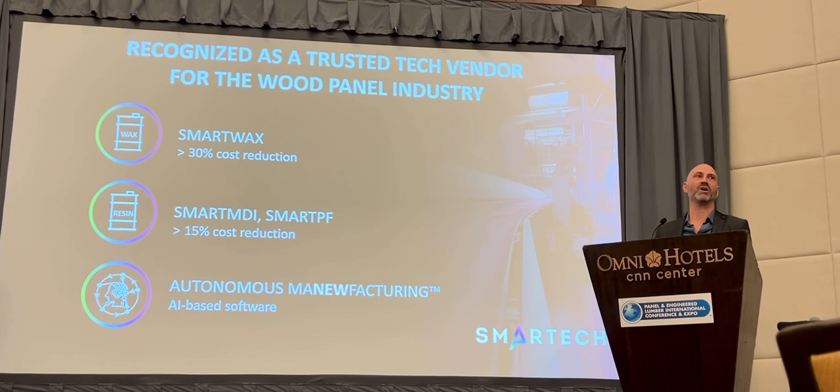A little bit about SmartTech. SmartTech is a technology company doing optimization on-premise, dealing with raw materials and optimizing them in real time, mostly known for the SmartWax system that reduces raw material by more than 30%, and now with Smart Resin, MDI, PF, doing more than 15% reduction.

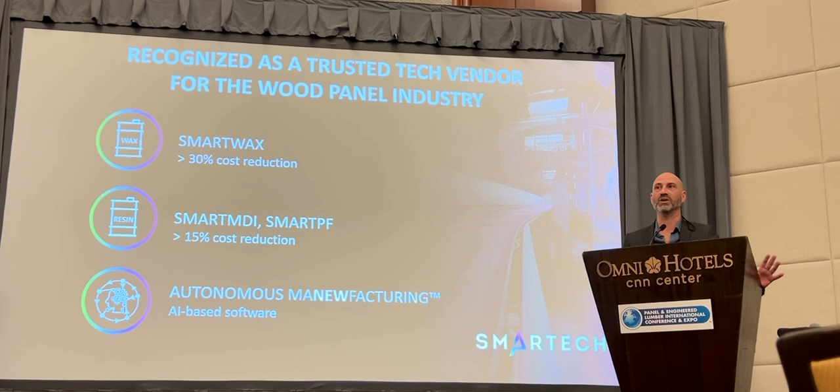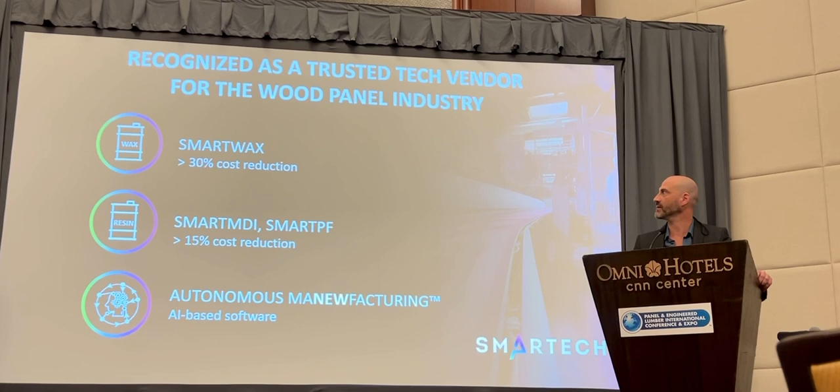I'm going to talk today about autonomous manufacturing, dealing with different raw materials, the virtual one, data, and what we can do with your data, and how we can optimize your production line with that technology, with AI technology.

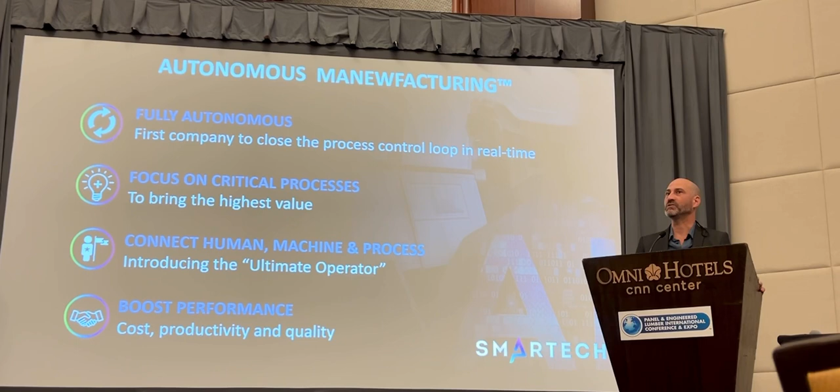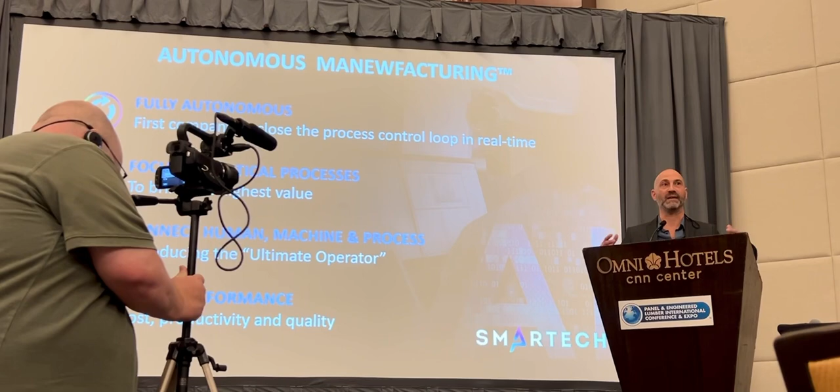When we started our journey around 8 years ago, we tried to focus on a couple of key factors that would bring something really different than Industry 4.0, trying to see what the future would be.

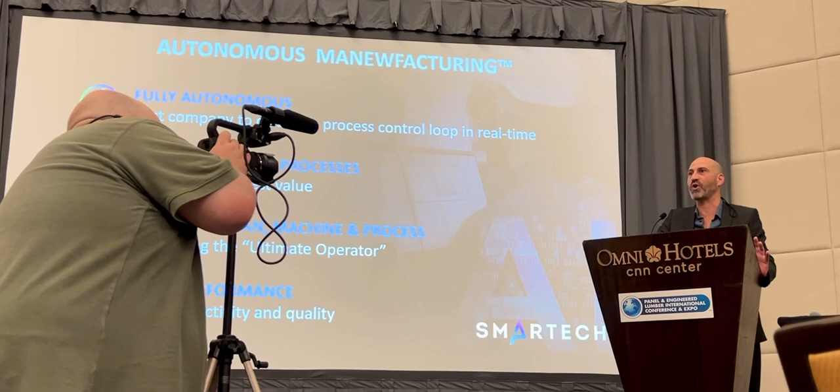The first impact we wanted to work with was to be proactive. We don't want to just give a graph and let the operator guess what to do. We wanted to really close the loop and give real-time values into the line.

The second point is, of course, understanding the production line. Every different factory, mill, or facility has different challenges, so we need to define the critical areas we'd like to focus on and work with you to define the question.

AI brain has a lot of knowledge, but how do you define the right question? That's something we work on with the customer.

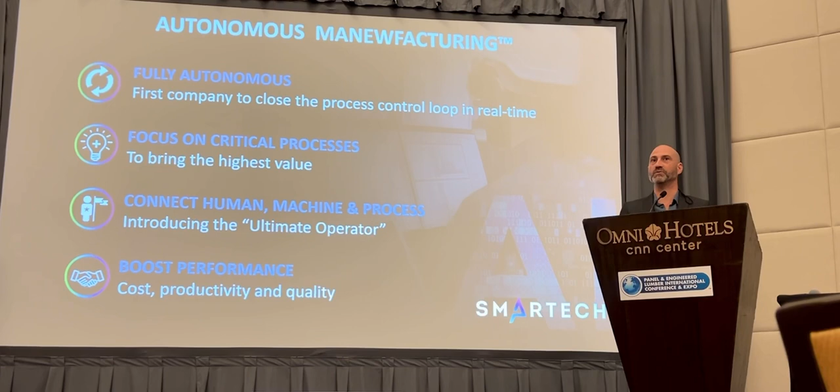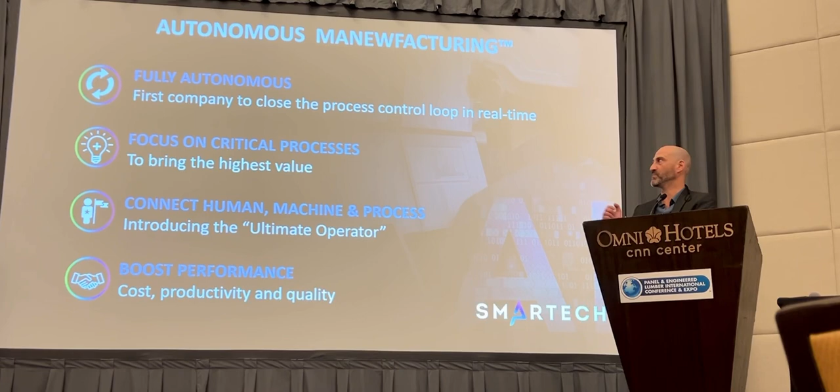Another point Timothy mentioned: what's the impact of the human being? All the technology until Industry 4.0 dealt with the connection between the process and the machine. But going further, putting the human factor into the game, how can we create that connection between the human, the operator, the key holders in your production line, the process, and the machine, bringing them together and creating the ultimate operator. And of course, we're doing all that in order to bring value.

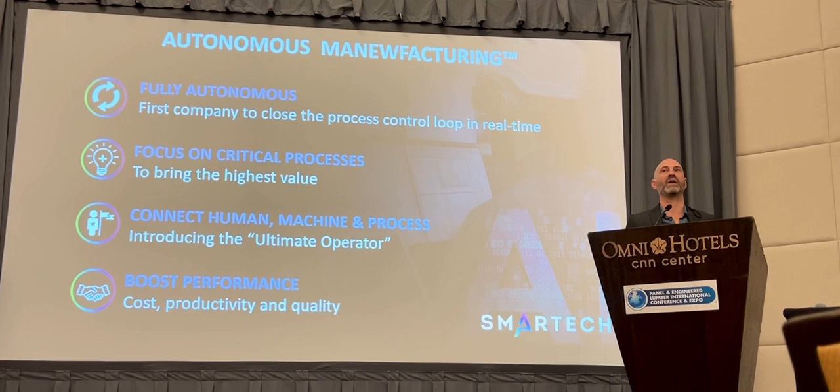When we talk about value, we focus of course on productivity, cost, and quality, but there are other values regarding knowledge and stability that we wanted to put into the game as well.

So when we started to look at that, we saw a huge number of production lines — wonderful machines, wonderful OEMs, wonderful machine builders — but at the end, the production lies in the hands of the operator.

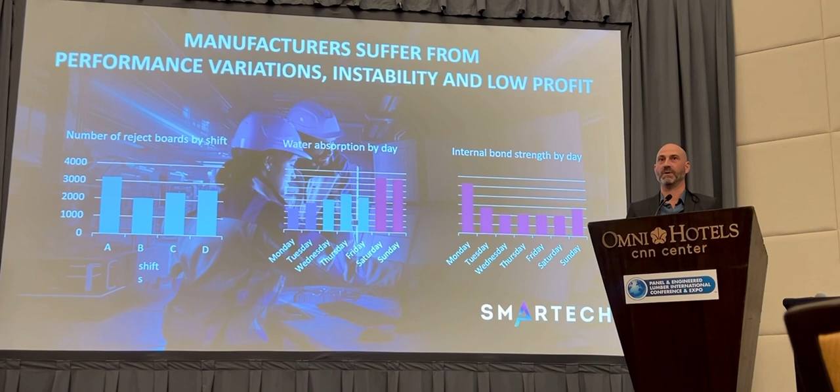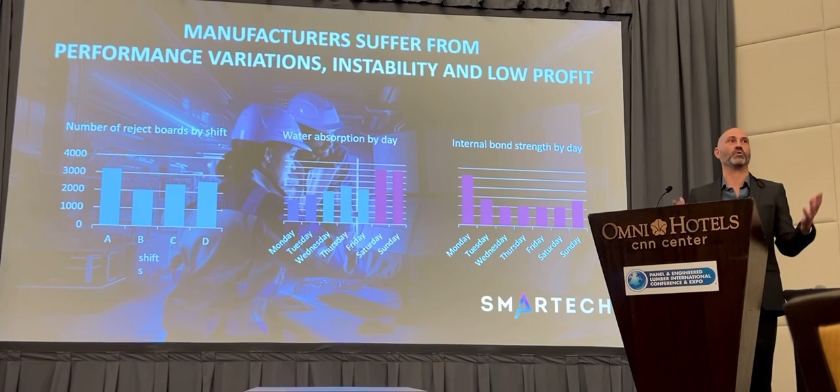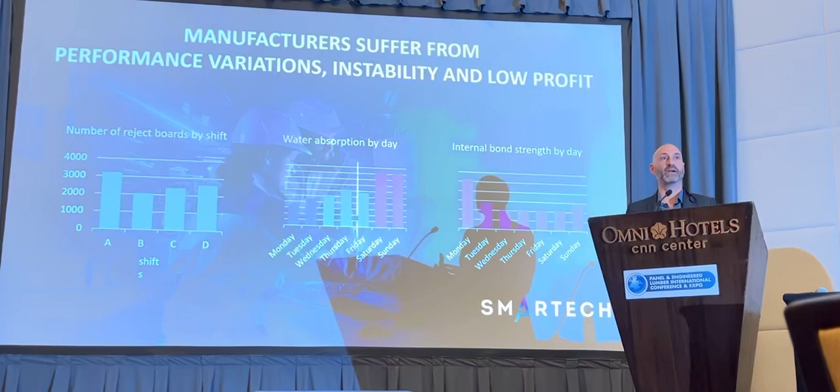We saw that when the shift changed every 8 hours, a new operator coming in, and the first thing he does is change the set points — 'this is how I used to work.' Those changes in human behavior are sometimes irrational, and they can cause a lot of problems regarding productivity, quality, cost, and stability.

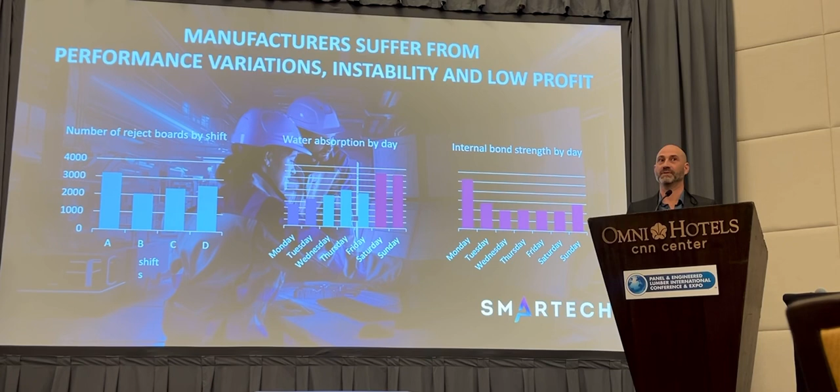If we're able to overcome that, we'll be able to create the ultimate operator that will basically stabilize the line and push it much farther. In order to do that, let's talk about the variance.

We map the HMI, we map the connections between the machine that affects the process — that's how the machine builder built it — and how the human reacts to that, because the operators have a lot of knowledge. There are guys with 20, 30 years of experience, and they do things a certain way — they have a lot of knowledge there.

Can we map their knowledge? Can we understand what they are doing good and what they are doing bad, regarding reward and punishment?

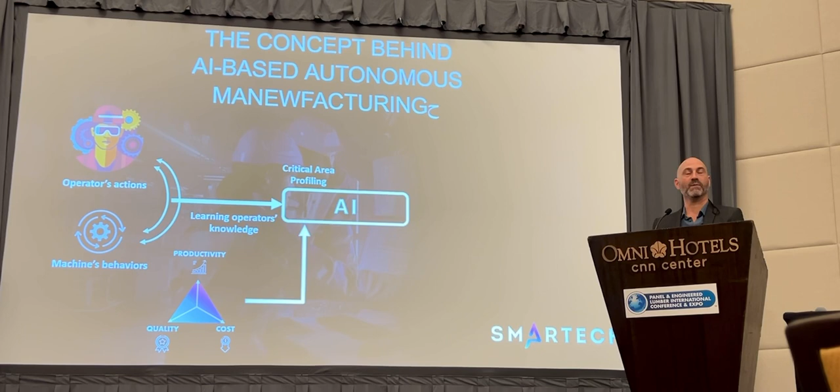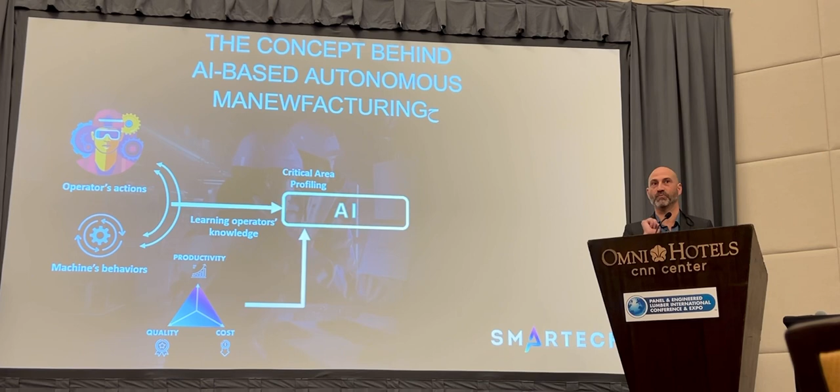Can we take the massive data from the human interfaces and map those connections and bring that into the AI? But not only that — putting in the right questions, focusing on specific critical points and what we want to improve, using the AI to build up the connections correctly, and then we'd like to reinforce those connections back, manipulating them for our need, in order to navigate to where I want the line to go.

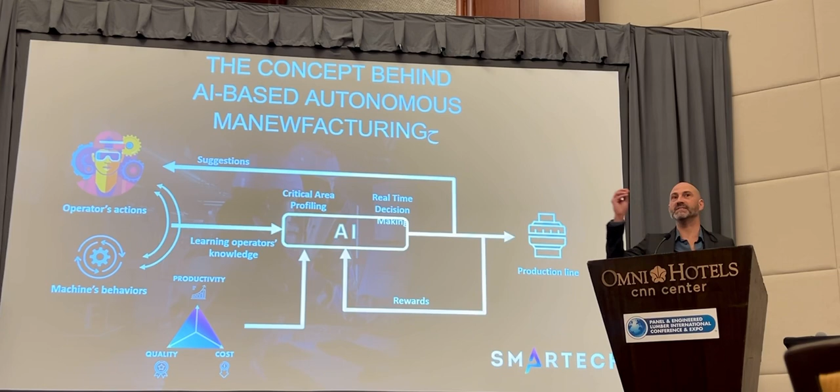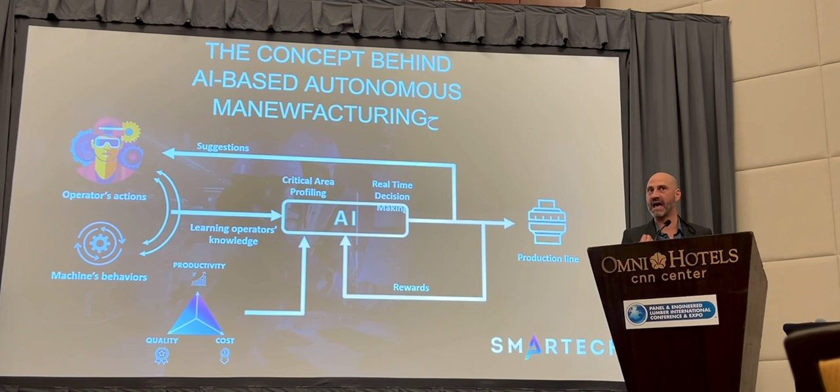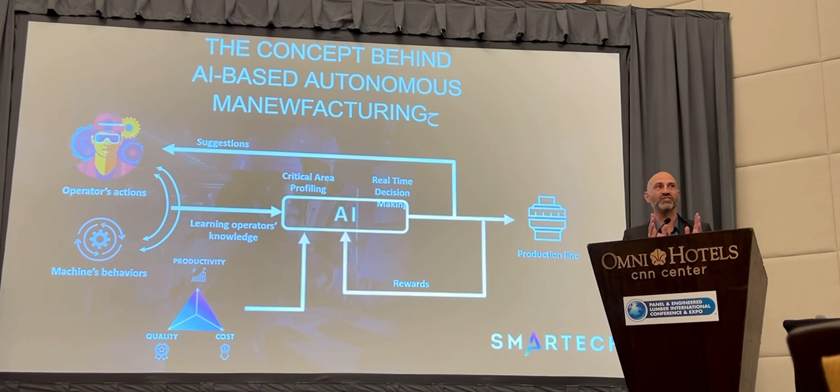And by doing that, we are able to give suggestions from one hand to the operator what to do - this is where you want to go, I will tell you what setpoint to change. Not only that, if you feel comfortable, if you can trust the AI, if you can trust the suggestion, then I will give you the possibility just to push a button and we will transmit those suggestions directly into the control system and basically close the loop with a reinforcement engine.

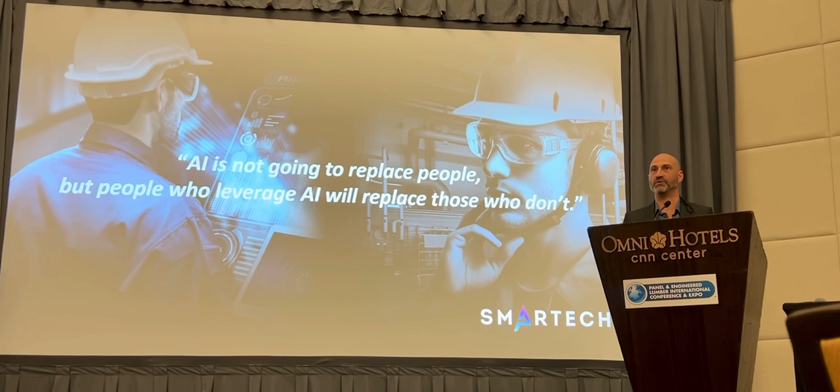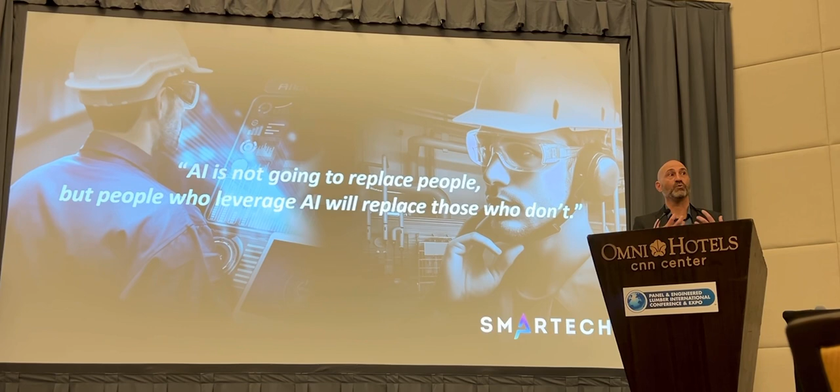And dealing with that, it's a huge challenge, and it's sometimes not a technology challenge. How can we create trust between an AI and the operator? Because at the end, we are not here to replace the operator, we are here to enhance it. With technology, it's well known, if you embrace that technology you can get an advantage compared to others, and this is what we want to create. We want to bring an enhancement to the operator and bring them to the point that they will act as an ultimate operator.

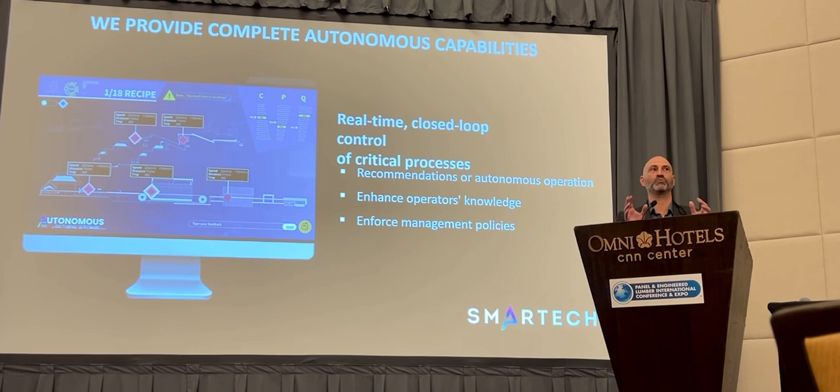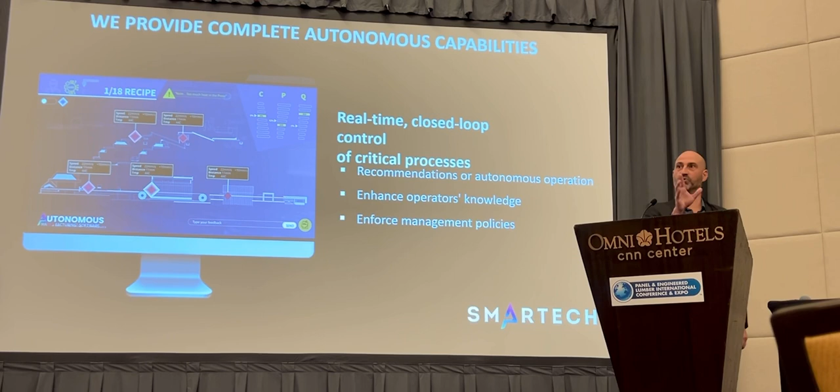So in order to do that, we wanted to look a little bit different on the situation. We don't want to give a graph to the operator to guess what to do. We want to give him a display that will tell him, this is where you want to go, we will define that, we will tell you exactly what to do, what to change. You can take your suggestion, try it, create trust, okay, and then push the button and let it stream in.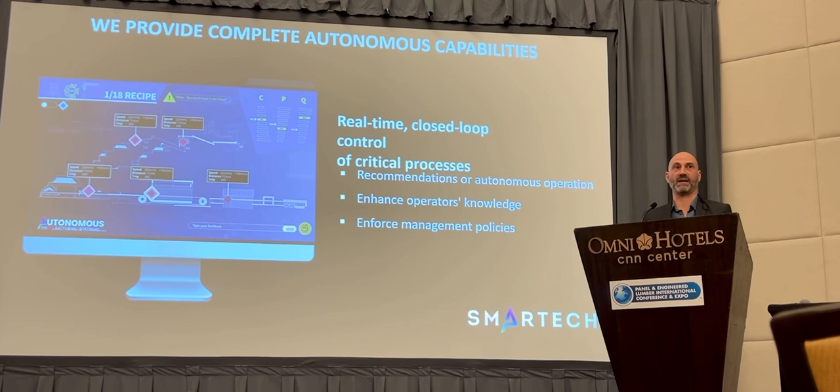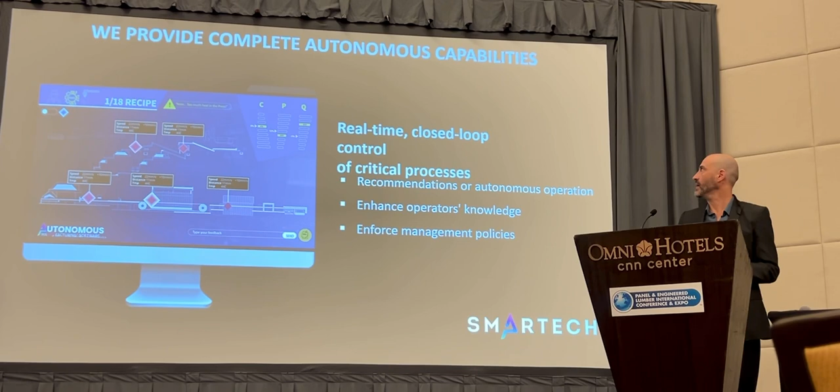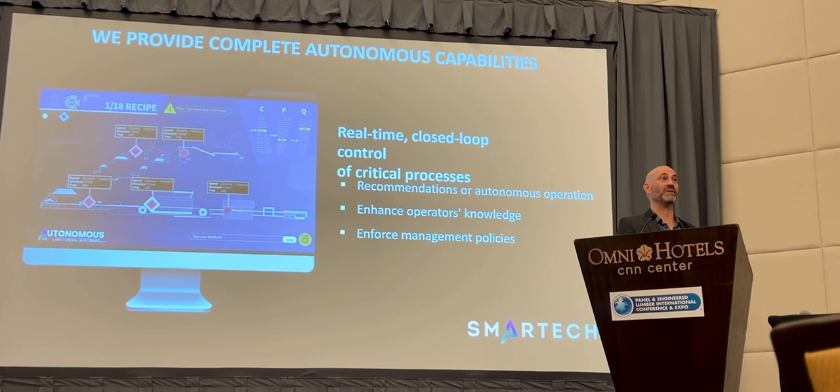And we are today the only company that really closed the loop in real time and making AI run a production line regarding a specific critical point. And of course, when we're doing that, we are mapping basically the human knowledge, and not only that, what are your questions, what are your targets. It's giving the management the possibility to be involved in the production, if you know how to ask your question correctly.

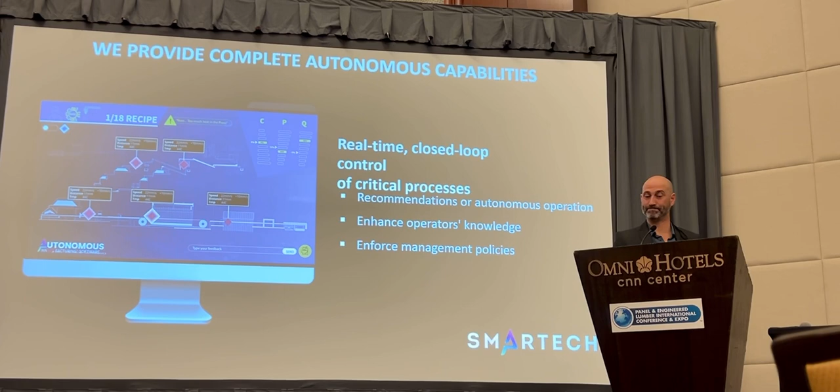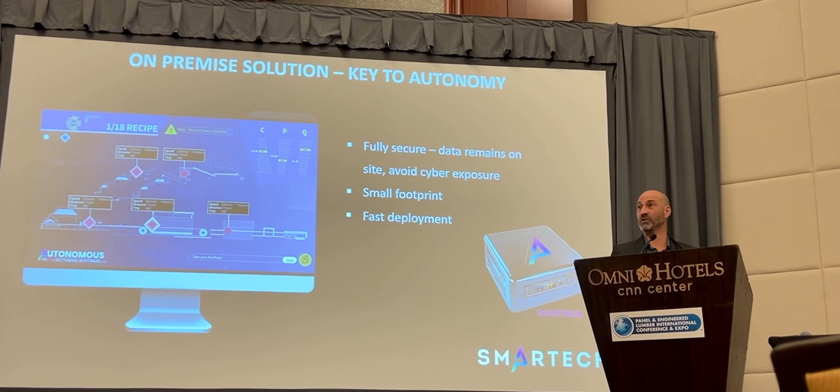And regarding technology, we had to build something new. We had to build something that will run high speed, with small footprint, that will be close to the machine, to the OT network, that will be able to digest thousands of parameters per second, will be able to close technologically the loop. So we built up a small footprint box, called smart box, with an AI framework.

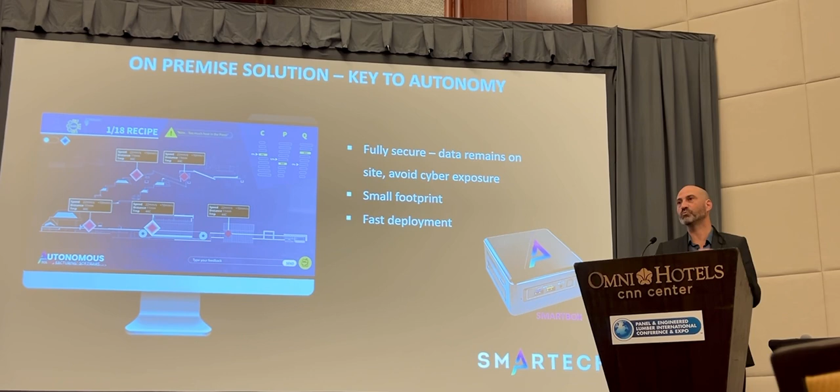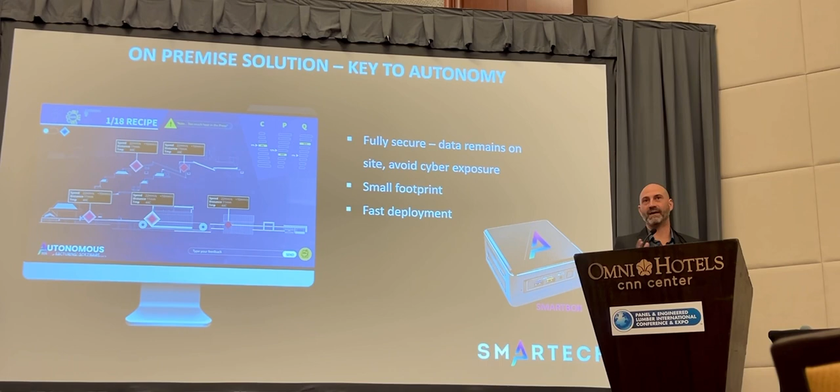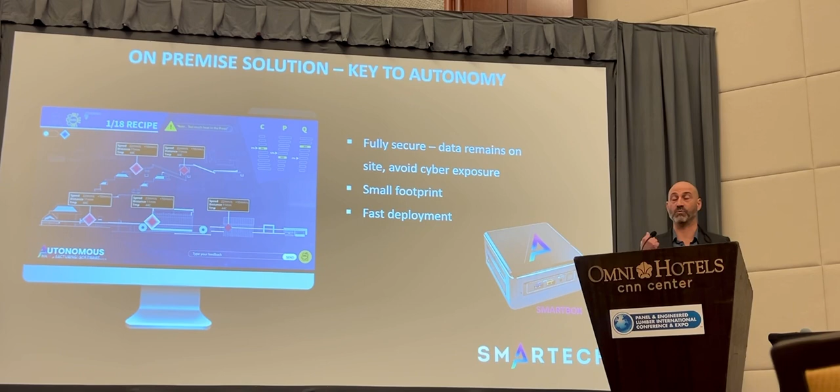It's an open framework that is able to bring AI models on premise, and we are keeping all the data on premise. We are not transmitting anything to the cloud, because unlike a traditional AI concept where we are teaching the models and then deploying the models, here the line is always changing, and I will talk about that. And you need always to adapt, okay, everything is changing.

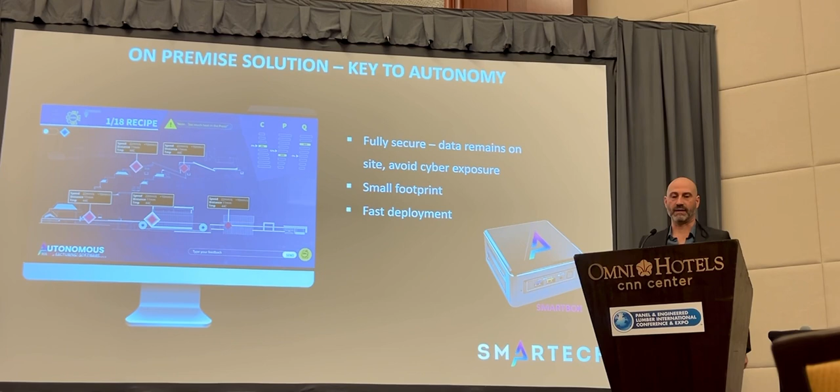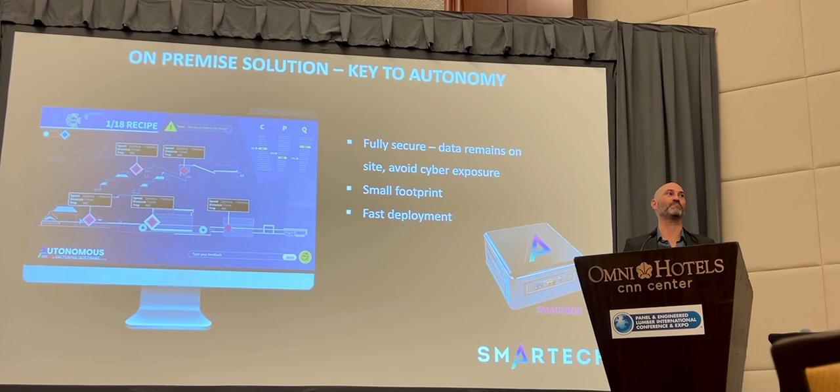And in order to do that, we are bringing that box into the factory, and of course it's secure. You are not transmitting any data outside. So it's giving the project to be very, very short regarding terms of IT security and other issues.

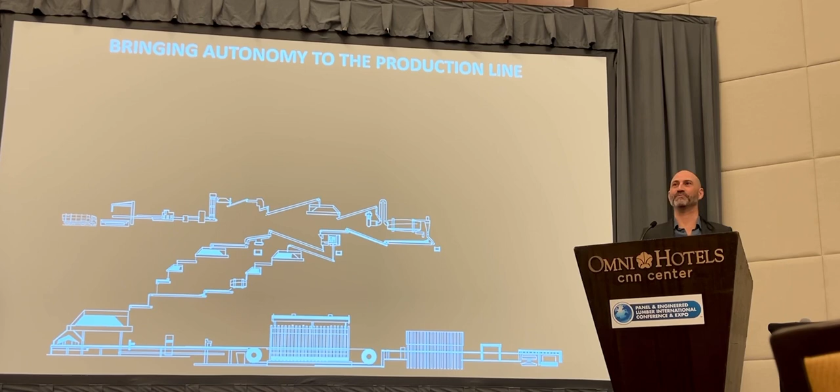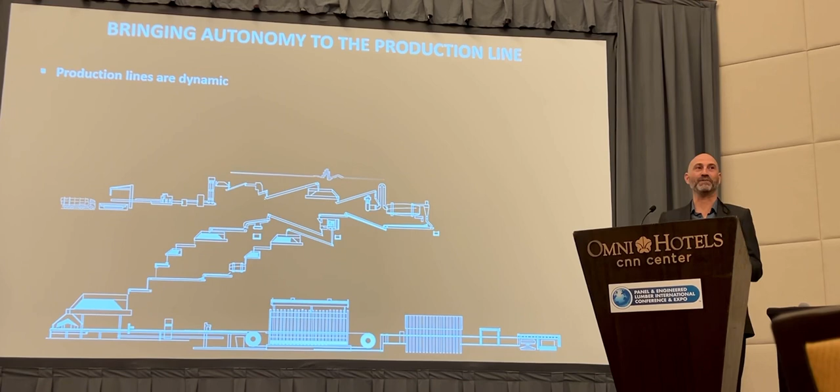So when we look at the production line, there are different production lines - that's one of the points. But working with engineered wood, working with pulp and paper, working with food mills, and so on, we understand that the production line is not fixed. A production line is a living, breathing organism. It's always changing because you're doing retrofits, you're changing machines, you're changing the raw materials, people are changing, seasons are changing. So, like a doctor, we need to listen to what's going on.

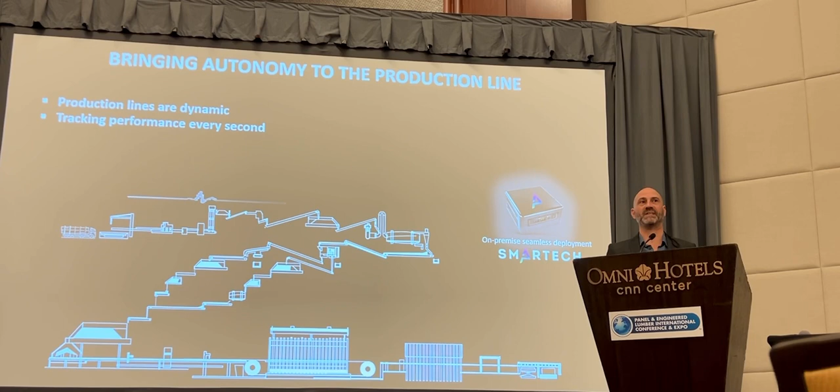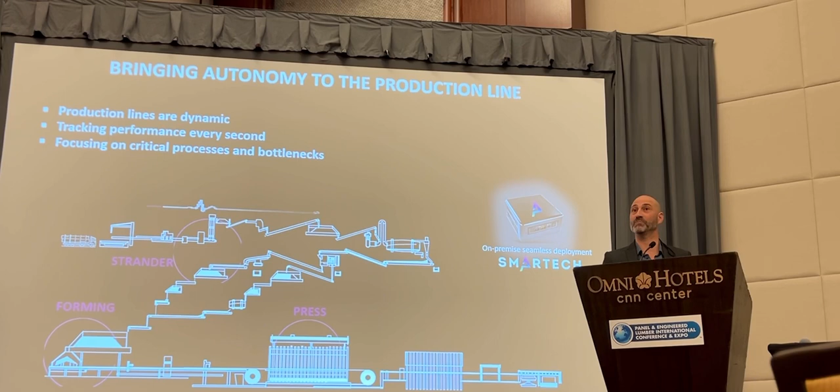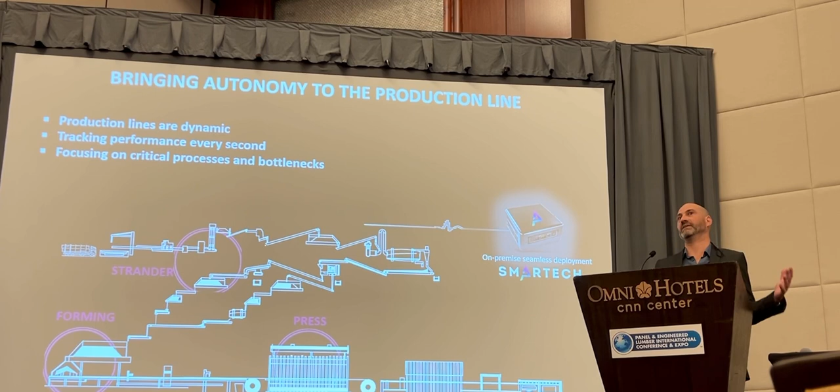So that's the point that we are putting in our box, basically tracking thousands of parameters per second of all the production line. But of course, building those connections, we need to focus on where the challenges are, where your bottlenecks are. If you're talking about OSB with a multi-daylight press, that usually will be a bottleneck. So if I'm solving that bottleneck, what will happen? Maybe the problem will shift to another one. So although we are collecting data from all the line, we don't want to - we want to focus on questions that we want to optimize.

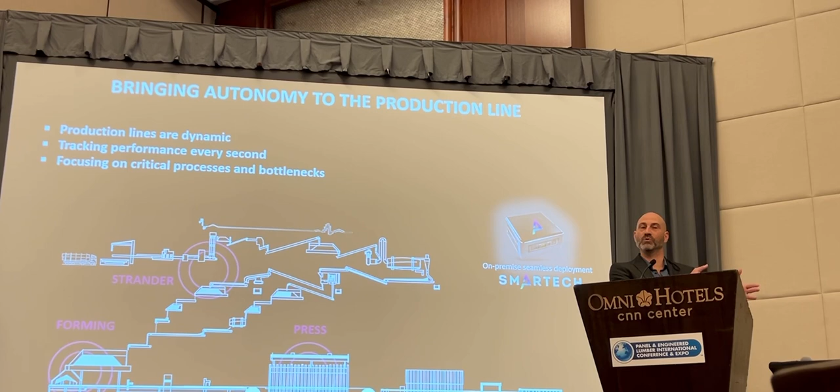In order to do that, our software supports a modular approach that we can bring in AI modules very, very fast to listen to the data core flow that we build and to learn the answer to the questions that we want to bring in.

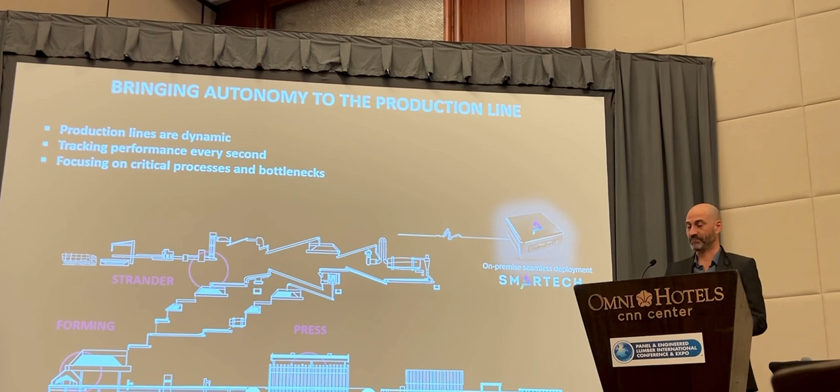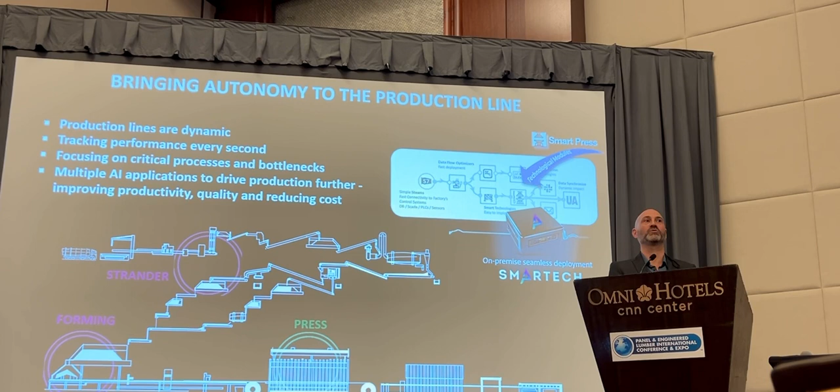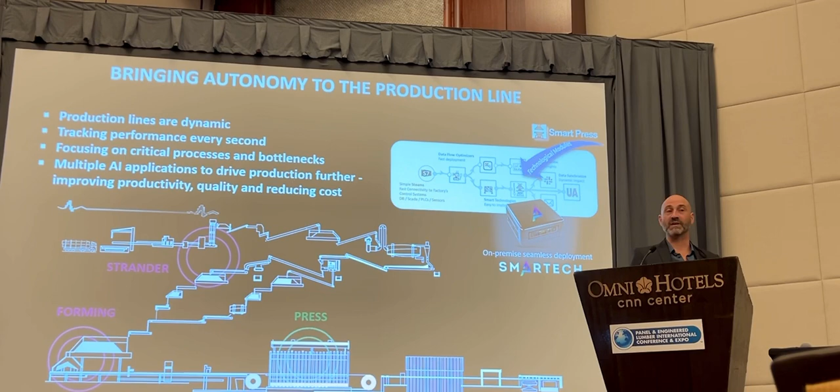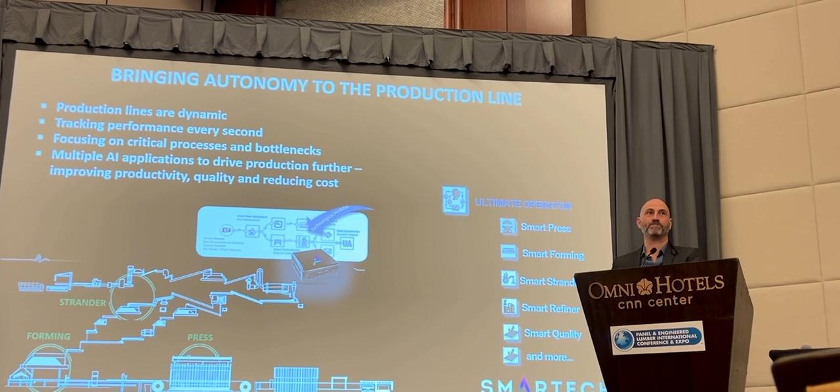For example, one of the modules is a smart press module dealing with continuous press or multi-opening press. When we bring in the module, it's optimized in that part, and then the problem shifts to another area. Then we deploy a different module configured with the customer, giving a full approach to all the different situations, problems, challenges, and bottlenecks over the line. The main goal is to optimize in a different way.

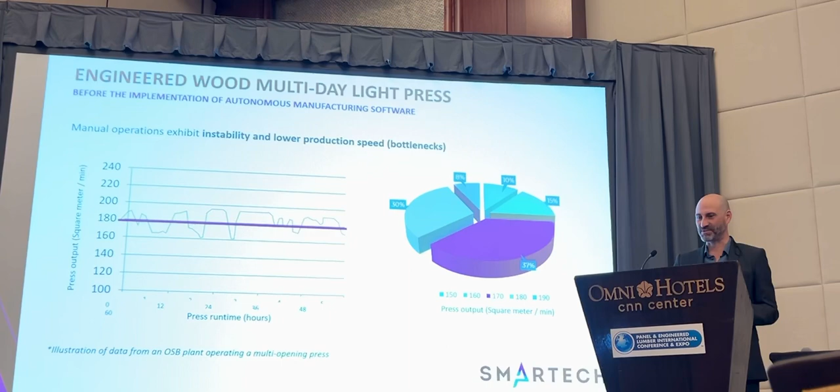Now, a little bit of examples. This is a project we did around 3-4 years ago on a multi-opening press, and it doesn't matter what the equipment is — you can attach to every equipment and get the data.

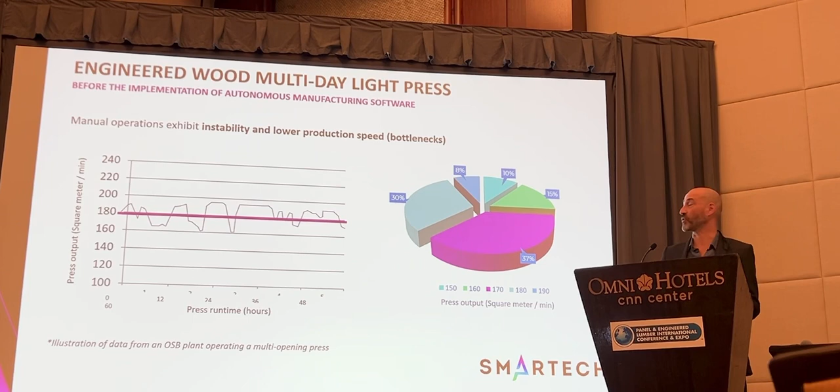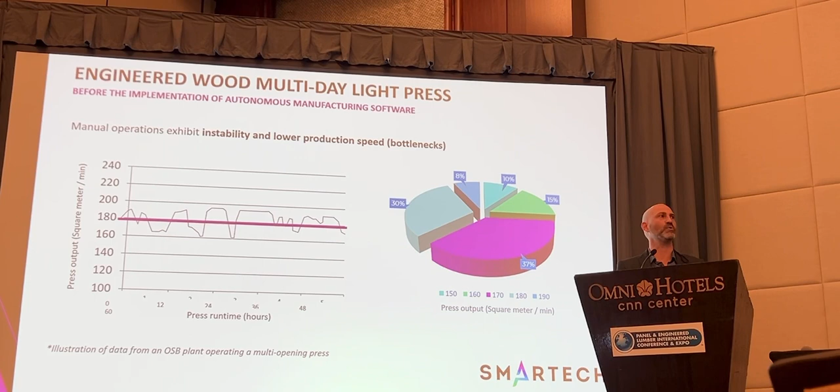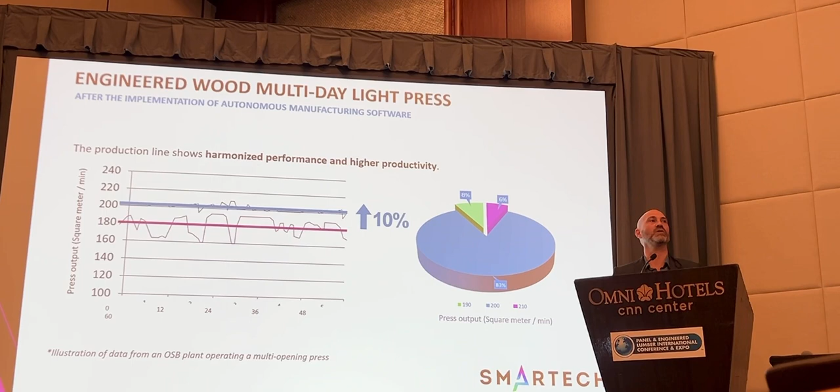If you look at the performance, you can see the production of the line is around 180 square meters per minute, and there's a huge deviation. If you look at the deviation, you see how the operator is working, and there's a huge deviation. When we start up our system, the first thing it does is minimize this deviation, because if I can minimize the deviation, I can push forward production dramatically. We increased total production of the line by 10%.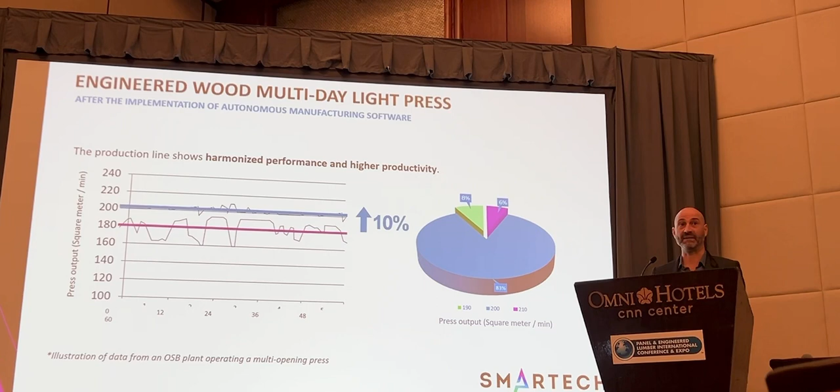Now you probably want to see how the system looks, so let's look at that. Minimize approach, keep it simple for the operator. Here's an example of a cooperation we're doing with Siempelkamp.

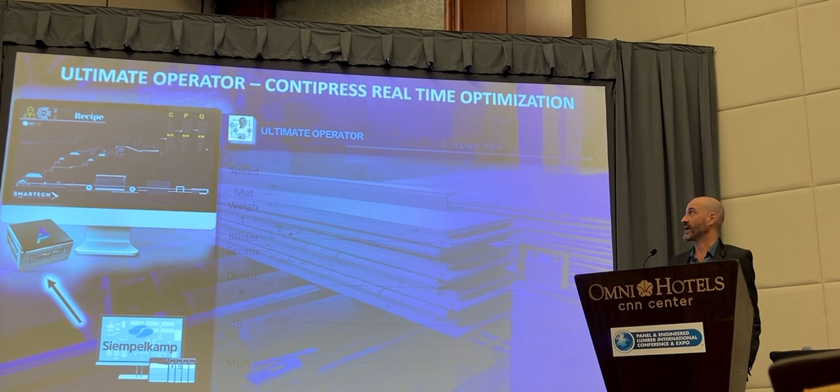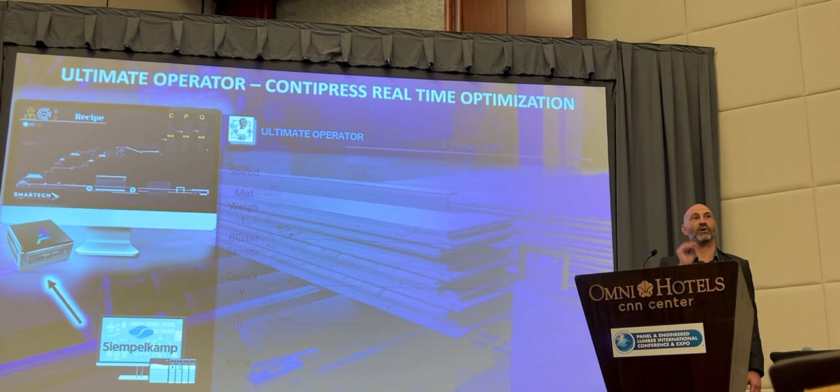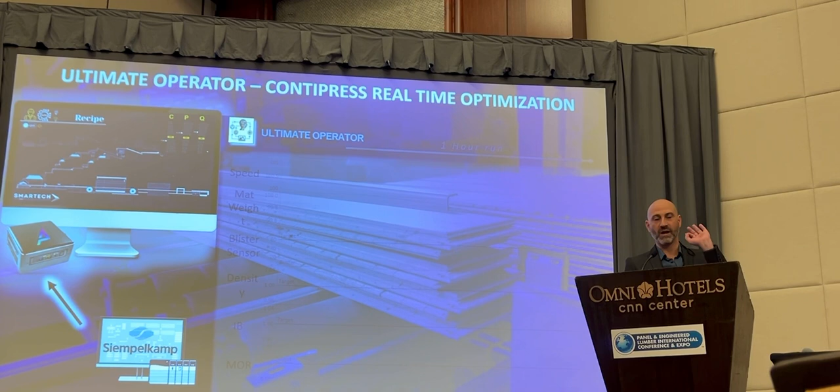We attach our box to the control system of Siempelkamp, reading thousands of tags per second, understanding what the operator is doing, and giving him a screen that tells him: those are the targets you asked for, now we'll tell you how to get there. In this drawing, we point to the set point you need to change in order to achieve that, and I'll show that in a minute.

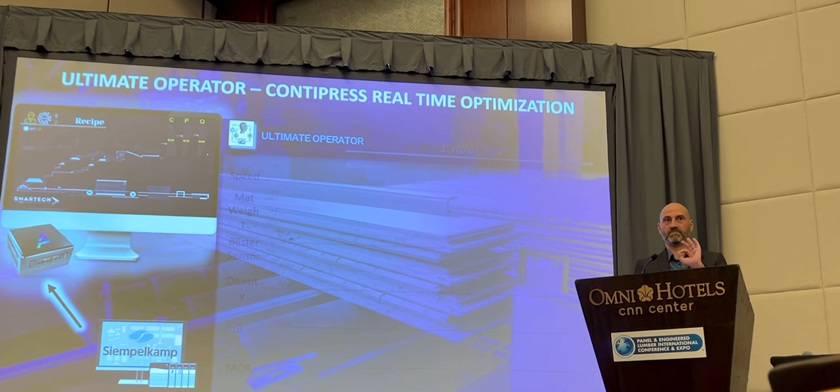But when you feel comfortable — it's a suggestion mode, try that, feel comfortable with the AI — then you can push the button. That button is integrated into the SCADA, and those values transmit automatically into the control system.

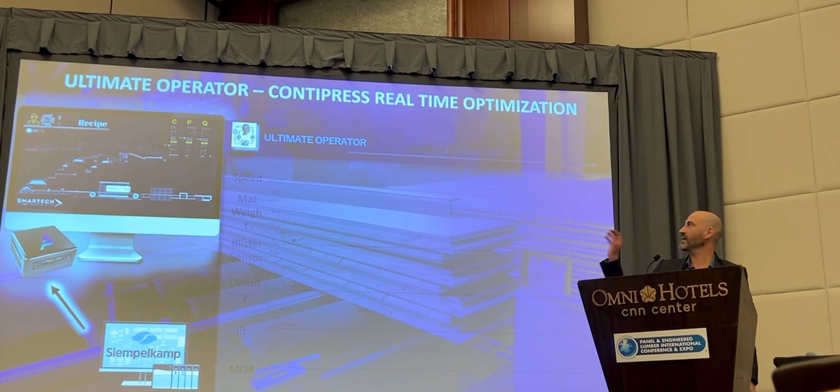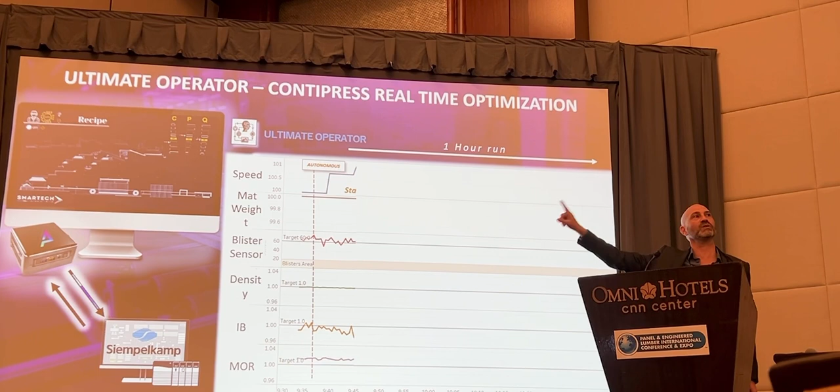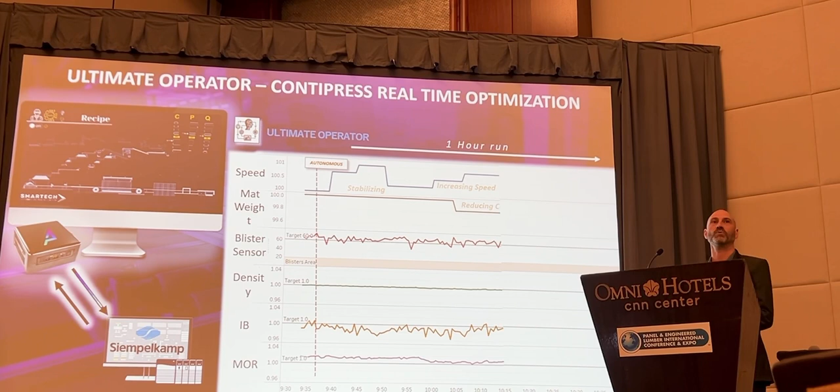So the system is running fast — I'm running it pretty fast — giving suggestions you can work with. When you feel comfortable, you push the autonomous mode, and those suggestions transmit immediately into the control system, basically stabilizing the line in around 15-20 minutes, then pushing forward productivity and minimizing cost in order to optimize overall production.

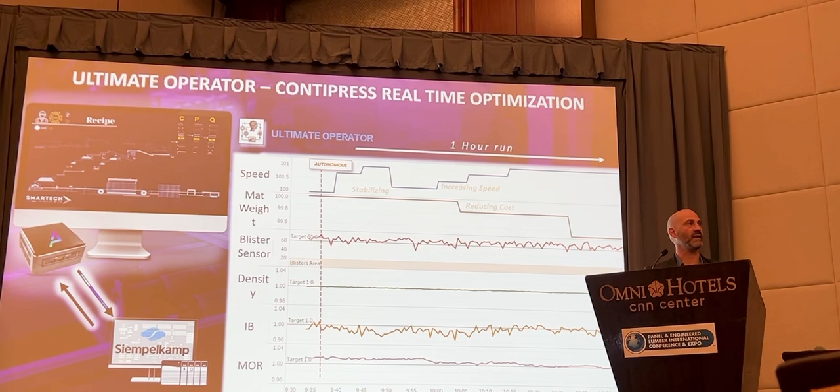But keeping your targets stabilized in a multidimensional equation — where do you want to go, how can I go there, how can I run it — that is a 1 hour run. Only 1 hour, that's the first hour you went into autonomous mode. Think about what the system is doing running 24/7.

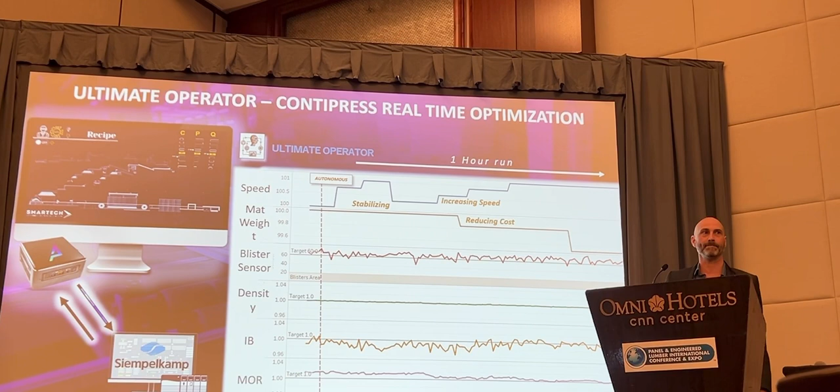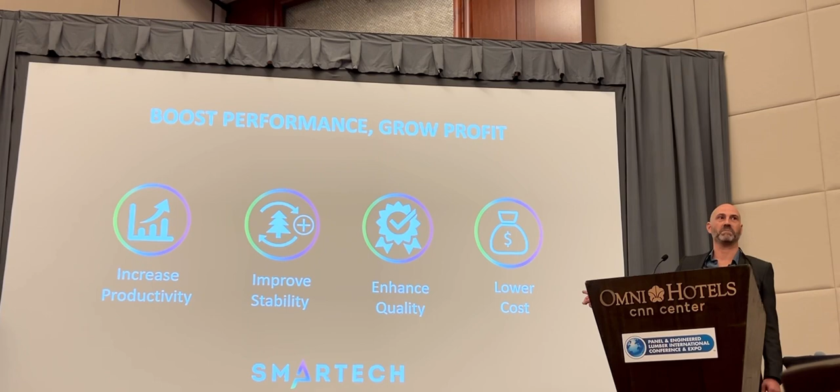So at the end, we want to focus on business goals: increase productivity — really increase productivity, touch the line doing that — improve stability, because what you saw here is a 9-dimensional problem. You have productivity, cost, quality, internal bond, MOR, density, sometimes belt mistracking issues. Define your challenges — those are the questions we put into the AI, how to optimize that in real time, enhancing quality and lowering cost.